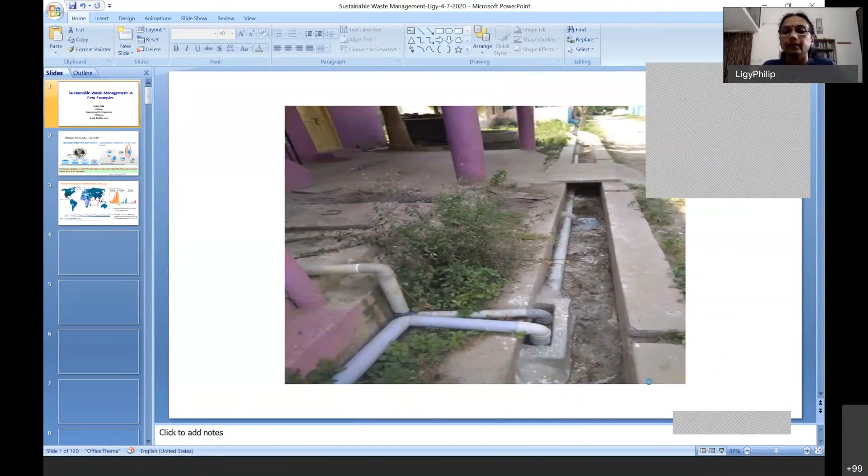Hope my screen is visible, ma'am. Perfectly fine. Okay, so yeah, I'll just start off.

I'll be talking about sustainable waste management, and I will explain a few examples of work carried out by our group. Before going into waste management, we will see what is the present status of our water and waste management in India and elsewhere.

When we talk about water, the world is facing water scarcity. If you look into the freshwater reserves, around 97.5% is salt water, and we have only 2.5% freshwater. Of this fresh water, around 68.7% is in glaciers, 30% is in groundwater, and surface water is only 0.4%. All the glacier water and a part of the groundwater and permafrost water is not available, so the available water sources are very, very limited.

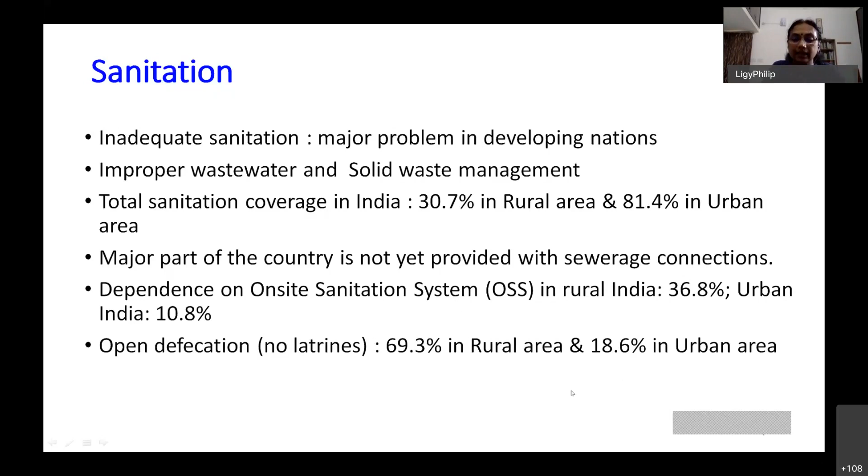When we talk about fecal sludge, this is another important problem we have to address. As I told you, we have sewer connections in only 12 to 14% of areas. So most households depend upon on-site sanitation systems, and all these systems generate fecal sludge. At present, in most places, people are just emptying it and throwing it away wherever free land is available. Only very little is getting treated, and this creates a lot of contamination in ground and surface water bodies and other sanitation issues.

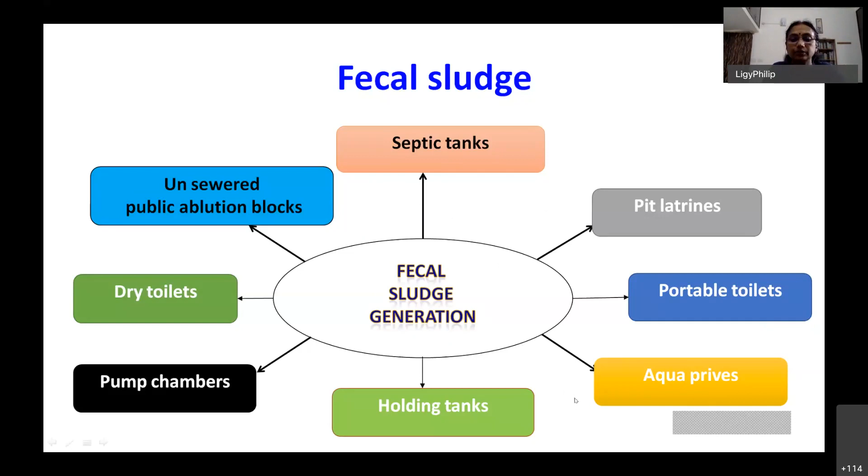When we look into wastewater treatment in Class 1 cities, around 498 of them, the sewage generation is around 35,558 million liters per day, and the treatment is happening only at 32%. In Class 2 cities, treatment is happening at only 8%. Class 1 and Class 2 cities together, the total wastewater treatment is 30%. That means 70% of the wastewater generated is going untreated into water bodies or nearby land. And this 30% that is getting treated is also only partially treated, because nutrient removal and similar processes are not happening in many existing treatment plants.

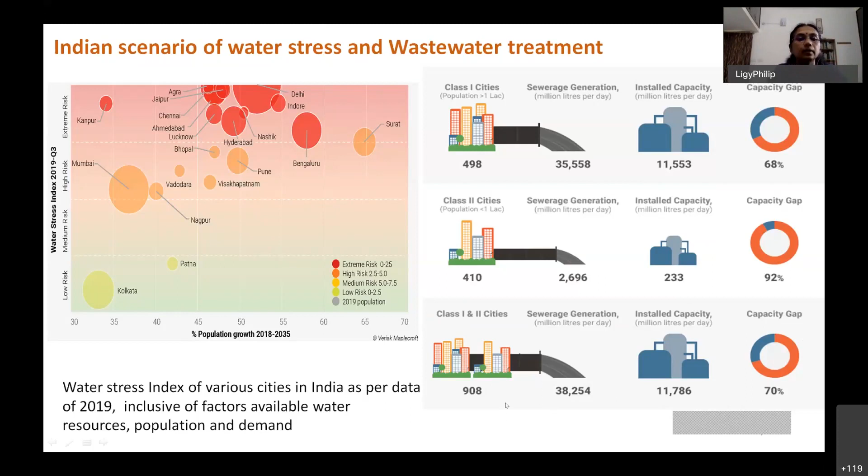And what is the problem? One is that they themselves can be toxic, and the second and most important problem is that when microorganisms come in contact with these pharmaceutically active compounds, they generate resistance. Antimicrobial and antibiotic resistance genes get generated in the microorganisms, and once these microorganisms have those genes and cause some diseases, the existing antibiotics will not be able to tackle the disease. So that is a major problem, and now a lot of emphasis has been given to monitoring this antibiotic presence in the water environment and how to remediate and treat it. A lot of research is going on all over the world.

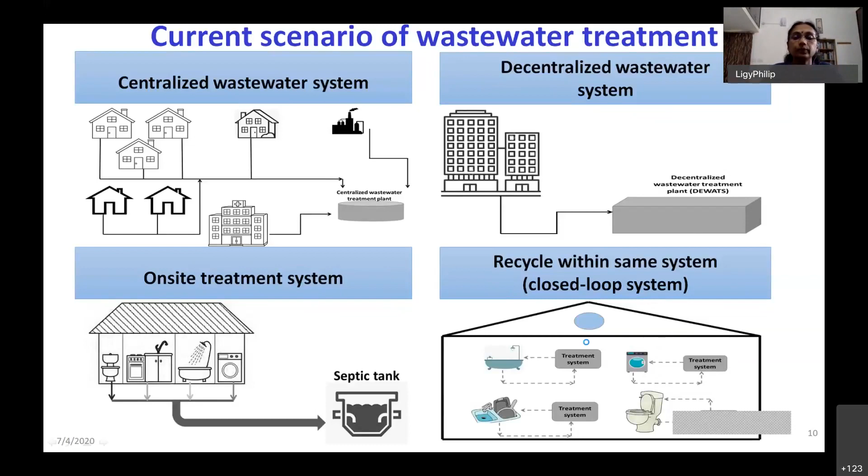As I told you, the current wastewater treatment practice is generation, collection, treatment, disposal - and reuse and recovery is not happening. So definitely it is not a sustainable system. A sustainable system means we have to recycle within it - the system should be a closed loop one, not an open loop one.

So we talk about circular economy, and this is very much applicable for waste management, whether it is solid waste or liquid waste. This closed loop or circular economy is very, very important for a sustainable system.

So there is a paradigm shift existing, and it is essential. In the past, wastewater or waste was considered a problem. Now it is considered a resource. And I keep telling you there are many examples.

The NEWater scheme in Singapore - because in Singapore, most of the wastewater generated is getting recycled. They are treating it, putting it into their rivers and reservoirs. From there, they take it back, treat it, and give us fresh water.

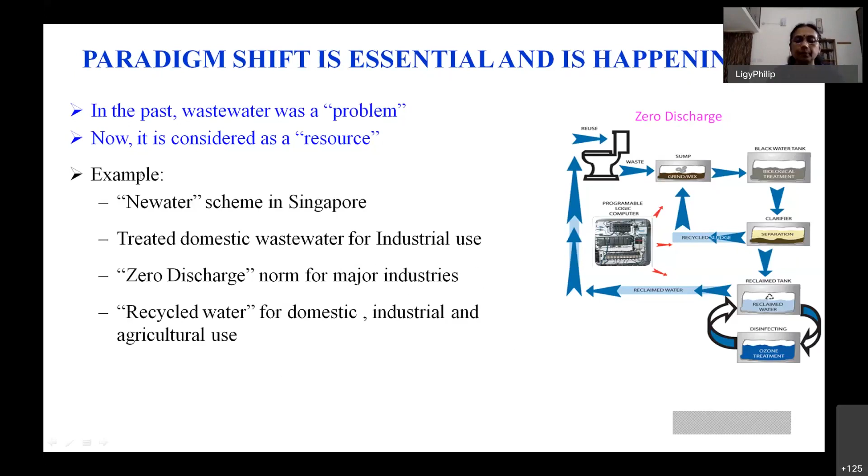Israel is another country where more than 80% of the wastewater is getting recycled. So each drop of water goes through at least 3 cycles of use before it is let into the sea. In India also, many industries are recycling wastewater, and zero liquid discharge norms apply to major industries because they cannot discharge any water. Whatever wastewater they generate, they have to treat it and reuse it within the industry. These things are coming up much better nowadays in India.

So what is the advantage of recycling wastewater? Here I am talking just about domestic wastewater. You know that we need nutrients like potassium, phosphorus, nitrogen, etc. for agricultural purposes and all.

So if you recycle the wastewater or recover the nutrients from the wastewater and reuse them, you will be able to recover around 16.6 Tg of nitrogen, 3 Tg of phosphorus, and 6 Tg of potassium. In terms of global fertilizer nutrient demand, we can meet around 14.4% of nitrogen, 6.8% of phosphorus, and 18.6% of potassium by recycling wastewater, because we know that all these resources are getting exploited. Potential revenue generation is also very high.

So when this type of scope is there, why are people not going for it? If you recycle the water from domestic wastewater, it is equivalent to 75% of the projected industrial demand in 2025.

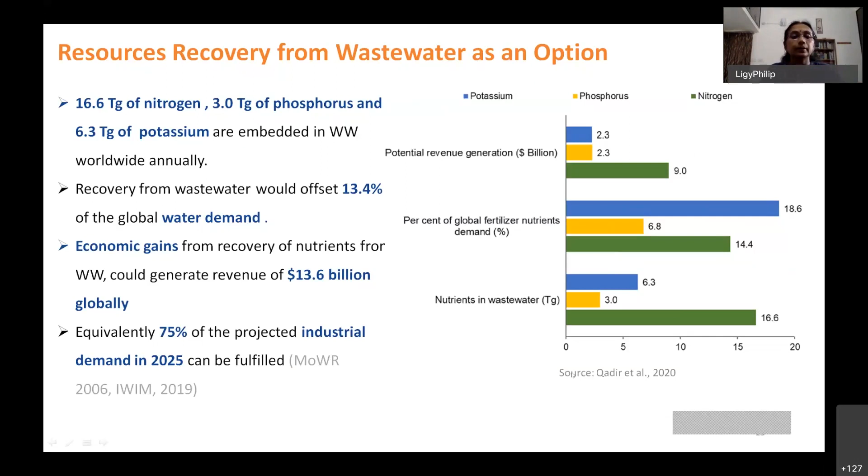That means the domestic water supply, if we can treat it and bring it to a stage where it can be recycled, then 75% of the industrial requirement can be met by that one. So the sanitation scheme in the future should be a closed loop.

Presently it is a linear loop. We get the fertilizers, cultivate agricultural products, bring them to the city or towns, consume them, and whatever wastewater is generated is partially treated, or majority is not treated. Everything is discharged into the river, affecting the health of the river and aquatic organisms.

And whatever sludge is generated is mostly dumped in landfills, contaminating the groundwater. Very little is used for agriculture purposes. So a sustainable sanitation system means this closed loop.

You take water from the river, use it for all purposes including agriculture, and you'll be having wastewater. You treat the wastewater properly to prescribed standards and reuse it for all purposes as much as possible.

Similarly, process whatever sludge is generated so it can be used as fertilizer. Whatever leftover water is of good quality can be discharged into the river to maintain the water flow, so river health is maintained and freshwater withdrawal is reduced significantly. This is a sustainable waste management system.

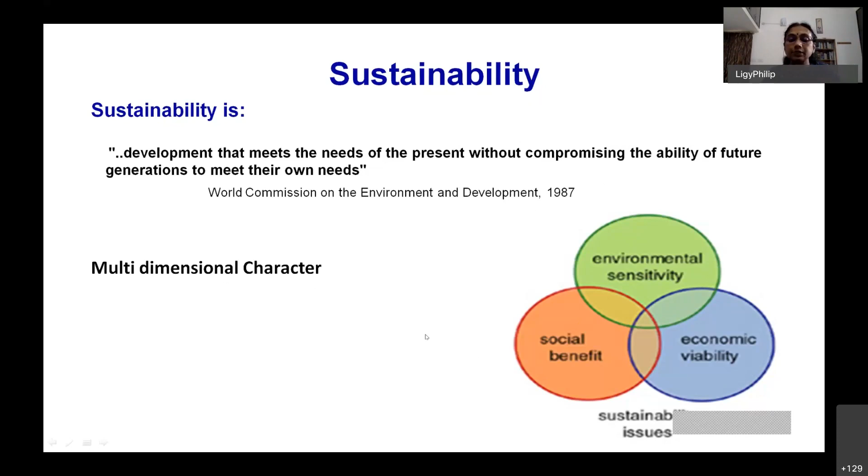By definition, sustainability is development that meets the needs of the present without compromising the ability of future generations to meet their own needs. It has a multi-dimensional character: you have to look into social benefit, economic viability, and environmental sensitivity. These are the three major pillars of sustainability, and all three aspects must be considered for sustainable systems.

When we talk about economic sustainability, the system should be able to pay for itself, meaning cost should be less than benefit, along with human well-being through optimal allocation of scarce resources. All resources should be included. Usually only financial cost and benefits are considered, but that is not the right thing.

We have to look into social impact and environmental impact, because if you have a water supply system that generates wastewater and it's not treated, it has a lot of environmental and social impact. Most of the time we only look into financial cost to assess if a project is economical, but that is not the right way to look into it.

When we talk about environmental aspects, we have to look for long-term viability, including containment of resource depletion, controlling emissions, and protection and efficient utilization of resources. Environmental sustainability means the ability of the environment to sustain human ways of life.

We also need to look into ethical aspects — don't go for anthropocentric policies, meaning assuming all resources are only for human beings and other creatures or living beings are not important. We have to look into nature's carrying capacity; if we exceed it, it will definitely have a long-term adverse effect.

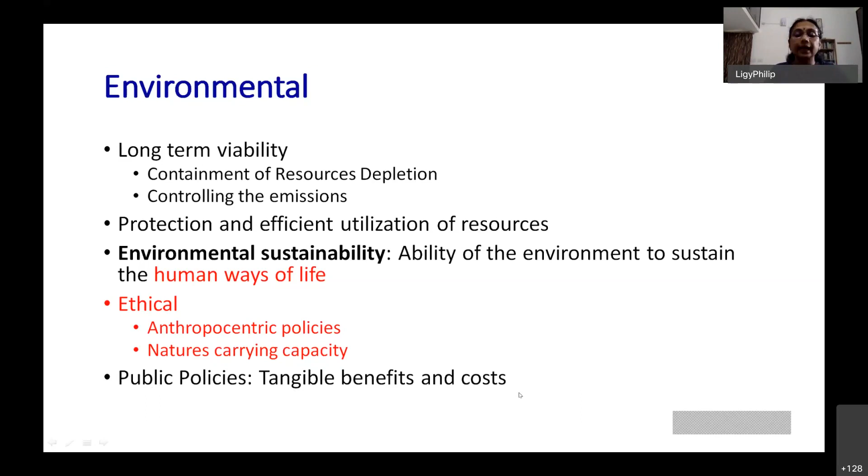Public policies mostly look into tangible benefits and costs, but we have to consider intangible costs and benefits when we talk about environmental aspects. When it comes to social and cultural aspects, we need to secure people's social, cultural, and spiritual needs.

When we talk about water in India, water is more than water, because we give much more importance to it due to religious and cultural reasons. For example, River Ganga is a river, but we know it holds much more place in every Indian heart.

When we come up with some systems, we have to look into social stigma, psychological inhibitions, etc. Technically you may think it's going to work, but societal acceptance or people's acceptance is necessary when we develop a system. Otherwise it will not be successful at all.

So how can we select sustainable technology? We have to carry out exergy analysis, that means total energy input, output, system energy, etc. We also need economic analysis, life cycle analysis, and general systems analysis, including material use, emission cost, required land area, etc. Unless we consider all these things, we cannot tell whether a technology or project is sustainable or not. I am not going into the details of calculation.

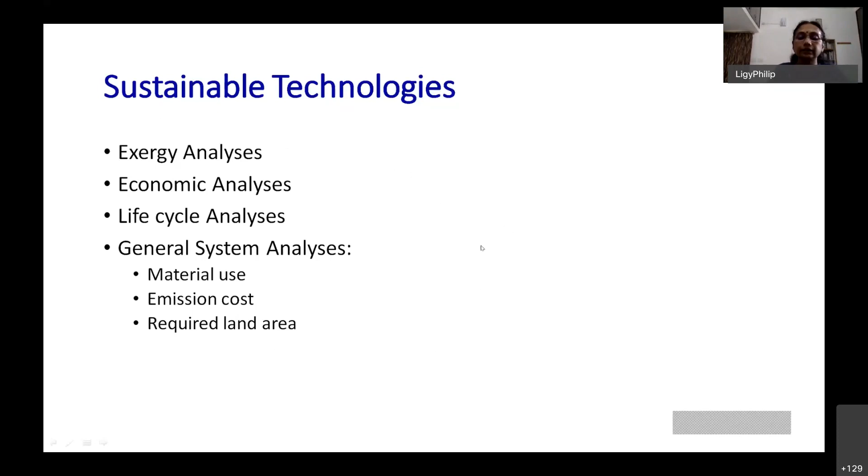Now I'll get into a few examples of closed loop waste management developed by our group. First, I will discuss what we do at IIT Madras. I have presented this in many forums, and I thought this will be useful for this group of people also.

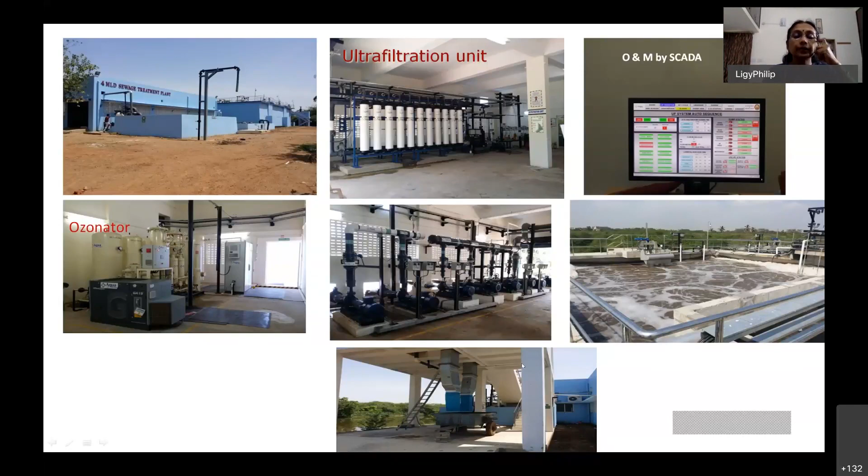So now what we are doing is the secondary treated water after ultrafiltration and ozonation, we are storing and supplying to all the toilets and other secondary users.

Then some water we are storing in a pond for flora and fauna enhancement. This will also enhance water percolation to some extent.

When we talk about toilet flushing, air conditioning and all, maybe around 60 to 80% of the water will be required, but we still have leftover treated water. So what we do is we have a filtration well with around a 2 meter deep sand bed, with perforated collection systems.

After the filtration well we have a long infiltration gallery. So the water after the filtration well gets into the infiltration gallery, and it slowly reaches the lake. We have a big lake in our campus which collects all the rainwater falling in our campus, along with the leftover treated wastewater after all the treatment. Then we have put up a water treatment plant here.

The water treatment plant can treat around 0.8 MLD, 8 lakh liters per day. We take this water from this lake and give it treatment - direct filtration, adsorption and disinfection. This water is blended with our water supply system, along with whatever we get from the Chennai Metropolitan Water Supply System, and used for supply.

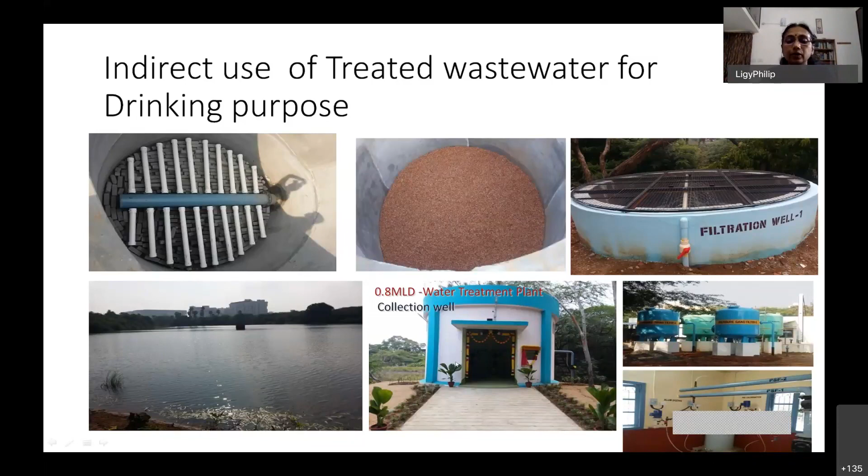So I'll show you the cost analysis. The total cost of the STP was around 10 crore, and the grey water pipeline throughout the campus cost around 7 crore. But if you look into the tangible economic benefit, more than 2.5 crore savings on water bill per year.

In Chennai we have to pay 60 rupees per meter cube of water. So when we get this much water through the recycled system, that much less water we are buying from the CMWSSB. So every year we are saving around 2.5 crore on the water bill.

This is the tangible benefit. The intangible benefit is that we are not taking out any water from the ground. Last year when there was a severe drought, our campus didn't have any problem because this recycled water was meeting more than 60 to 70% of our requirement. So we didn't have any problem.

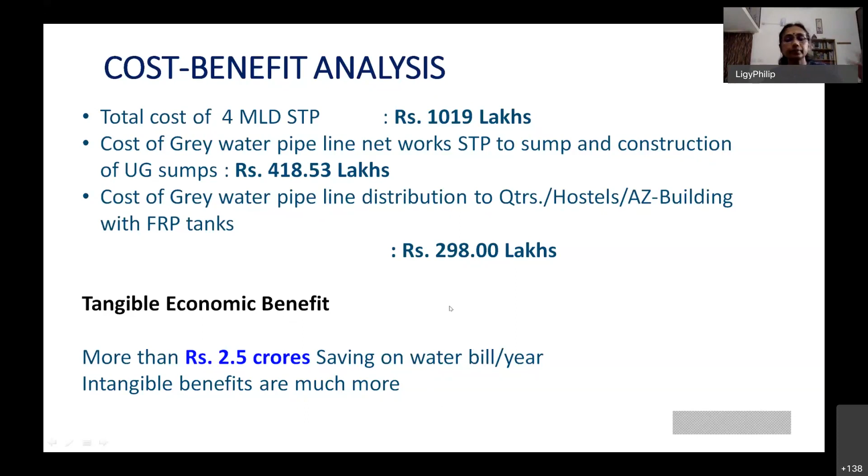So what I'm trying to tell is economic benefits are there, and a lot of intangible benefits are there. We have looked into the cost benefit analysis based on capacity - what type of plant will be economical. If you go for very small plants, it may not be that economic. All these things we have looked into.

And what is the impact - by seeing our plan, Chennai Metro and Sewerage Board is planning to recycle water for domestic supply. Already industries are using the recycled water. Already 2 plants of 10 MLD are under construction, almost getting over. They're planning to put up another 260 MLD recycling system. And IIT Madras is providing all the technical advice for all these projects.

Because if you do something good and it is sustainable, and people see the good points of it, definitely we don't even have to go and publicize it. People come to know and it will be multiplying. That is a good thing about this.

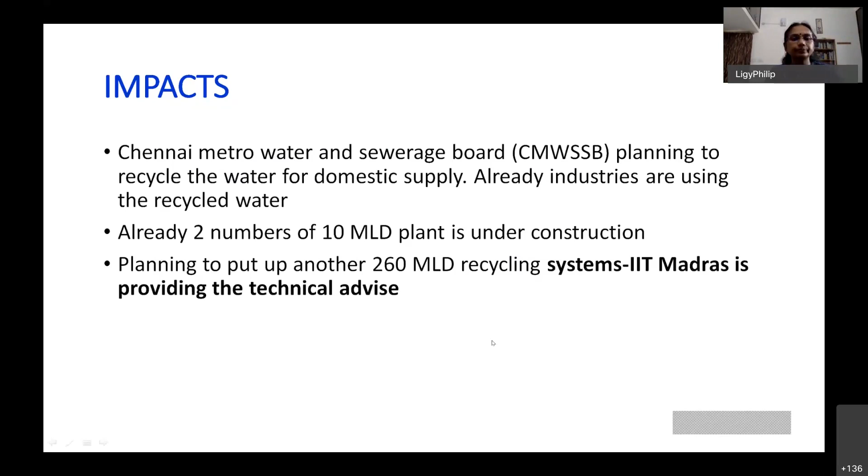So now I'll talk about other systems - integrated water management, whether we can have zero liquid discharge, or how we can minimize freshwater utilization in any household. When we talk about sustainability, it should be reliable and cost effective, social acceptance should be there, less demand on resources should be there, and closed loop should be considered as far as possible.

So this is household wastewater closed loop management, what we always talk about. If you take 150 liters of water per person per day, we use the water for drinking, cooking, bathing, laundry, non-recycled toilet, all those things. When we talk about different users, very good quality water is needed for drinking, cooking and dishwashing.

We cannot take any risk there, because we are dealing with people and health is very important. Then when it comes to bathing and laundry, good quality is enough. For washing floors and other things, moderate quality will be sufficient. When it comes to toilet flushing, we don't have to use drinking water quality - the quality can be poor. Poor means there should not be any pathogens.

Because when you use recycled water and if it is having pathogens, when you do the flushing, aerosols will be generated. Those aerosols can have the pathogens and it will be creating problems. So we have to see that whatever water we use for toilet flushing is free from pathogens. That is one thing, and it should not contain large quantity of organic matter.

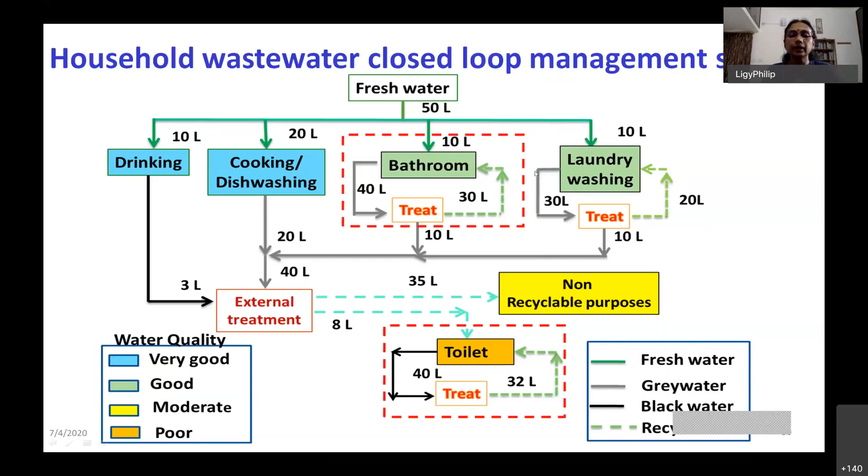So what we have done is, we wanted to do an extensive study. We looked into different economic classes of people in the IIT campus, their water consumption for each purpose, how they are using the water, and so on. We have complete data, and we have published papers on this.

Water availability varies depending upon the economic status of the house, because as per government rule, based upon the square feet area of the house, the water tank capacity also varies. So that is what is happening here.

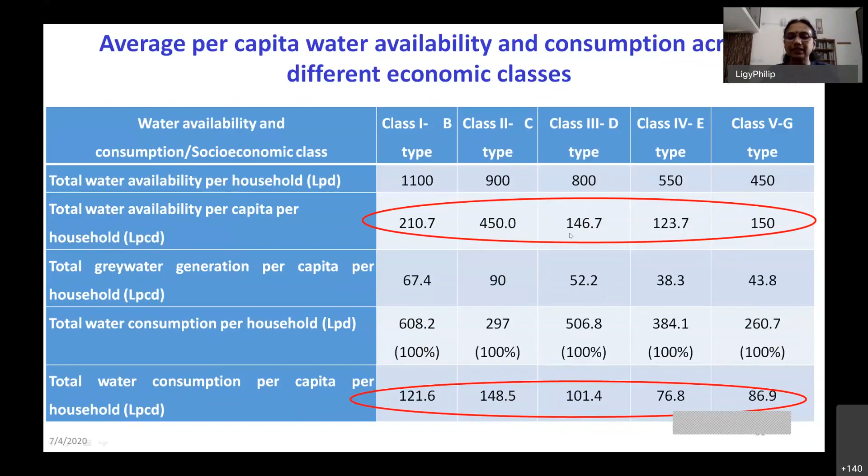If you see the water consumption pattern, this is in Chennai, India, where the weather is very hot, so maximum water is used for bathing purposes, then toilet flushing, and other purposes you can see here. Now, for the generation of organics household-wise - B type, C type, D type, E type, G type, these are the government types of housing - you can see that depending upon the household type, the organic load is varying.

From bathroom water, laundry water, kitchen water - the axis also you see here, it is 200, 400, and here it is 500, 1000, because kitchen water has much more organic load compared to bathroom and laundry water. Bathroom water is relatively clean, so the treatment is much easier.

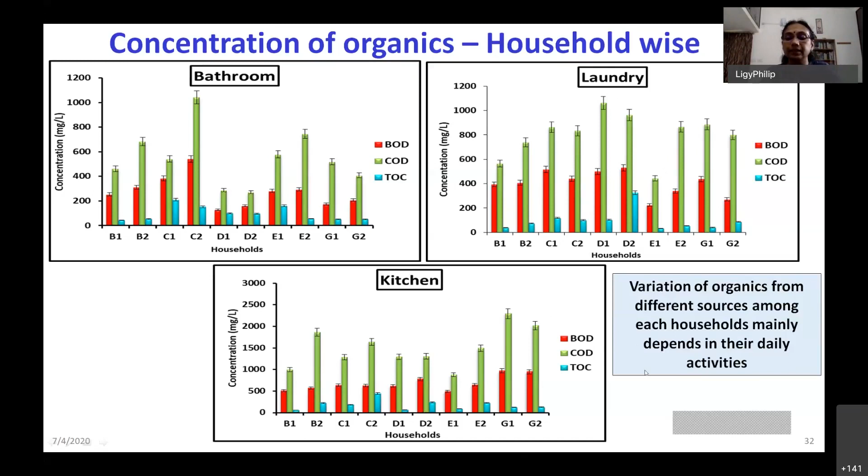We also looked into microbial contamination from sources and households. Tap water doesn't have anything. Bathroom water has some total coliforms and fecal coliforms. Laundry water has it too, and kitchen water, sometimes where they are using non-vegetarian food, we could see some fecal contamination in the kitchen water also. The contamination also varies depending upon the households and the age group of the people there. Wherever very old people and very young people are present, the fecal coliform in bathroom water, laundry water, and so on are high.

Another important thing to look into when we talk about bathroom water, laundry water, and so on is the presence of surfactants. Kitchen, bathroom, laundry - everything has a high amount of surfactants because we use different types of detergents for various purposes. So naturally, it will come out in the water.

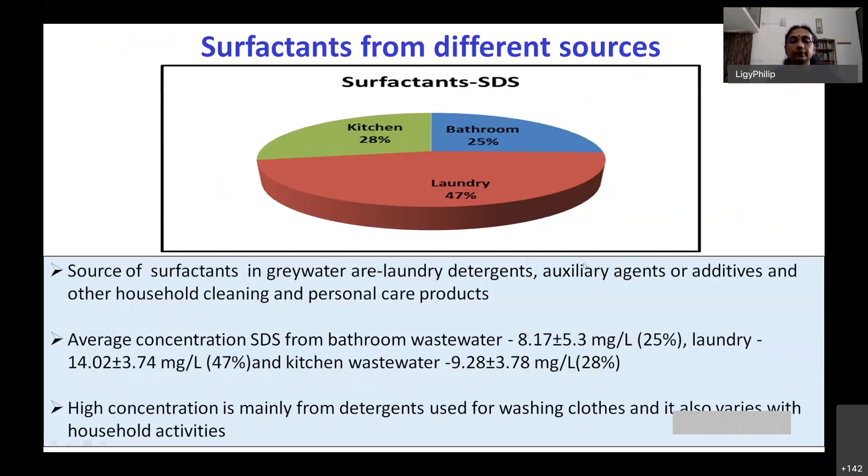We also looked into emerging contaminants like personal care products and pharmaceuticals, and we could see that around 78 different organic compounds were identified. Bathroom wastewater had a high number of fragrances and flavors, followed by pharmaceuticals. I have summarized here what we have seen: softeners, pharmaceuticals, preservatives, fragrances, emulsifiers, surfactants, dyes - all these things are coming in the water. So when we develop a treatment system, it should be able to remove all these contaminants.

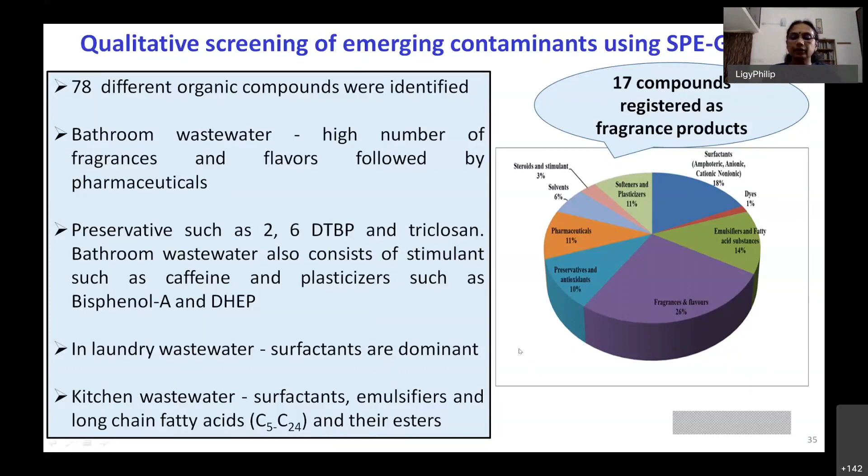When we recycle the water, there will be a lot of risk and it will create other problems. So after analyzing all those things, we thought we'd have a treatment scheme.

This is the grey water treatment system we have proposed. Grey water means water from bathroom as well as laundry. So coagulation, flocculation, and settling, followed by ultrafiltration, because after coagulation, flocculation and settling, still some dispersed flocks will be there, so we have to have adsorption.

After this treatment, this can be used for toilet flushing, gardening, floor washing, because the water is relatively clean. But if you want to go for bathing, we have to see the risk associated with the compounds which come in contact with the skin.

Most of these emerging contaminants have some risk, so we have to remove all of them. We thought that an adsorption system may be a better option. But the most commonly used adsorbent, activated carbon, is not capable of removing all types of compounds, because you will have both hydrophilic and hydrophobic compounds present in the system. So we have to have some adsorbent which is able to remove all types of compounds - we have to tailor make the adsorbent.

So this is a sustainable treatment and reuse concept. You have the bathroom water and wash basin water, you collect it, treat it, and use it for flushing and even for bathing. This is the concept we have employed.

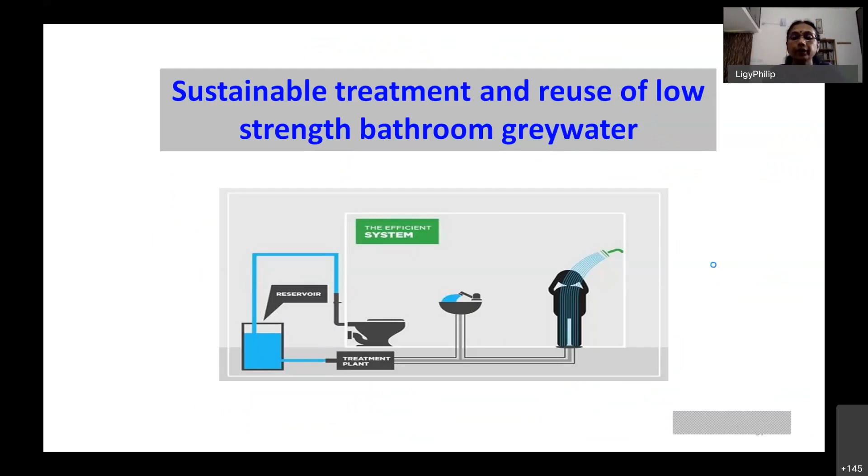So this is the coagulation flocculation unit, ultrafiltration unit, and adsorption. Whatever sludge comes out will be going to the drains, to the toilet water. So it will get treated there, and after adsorption, water will be going for bathing.

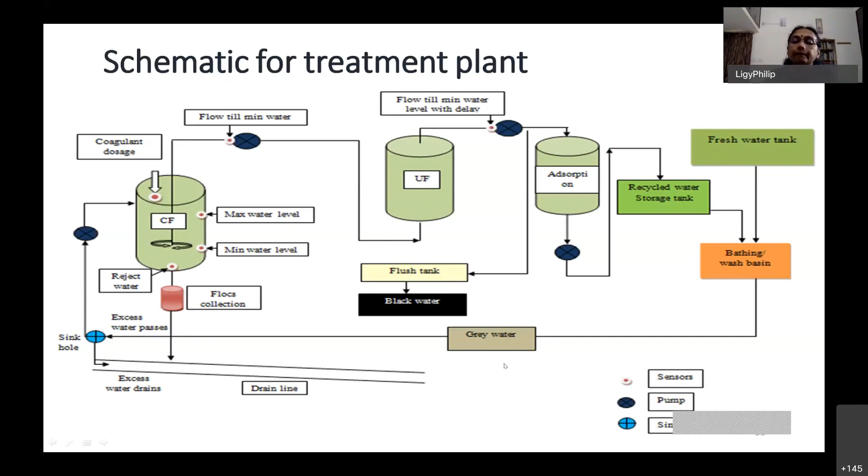For ultrafiltration, we have used the available PES membrane, but what we saw was the flux was reducing significantly. So we modified it with silica - we coated with silica and doped the silica membrane, modifying the PES membrane. You can see that by modifying, the removal efficiency has significantly improved, and even the water recovery is significantly improved.

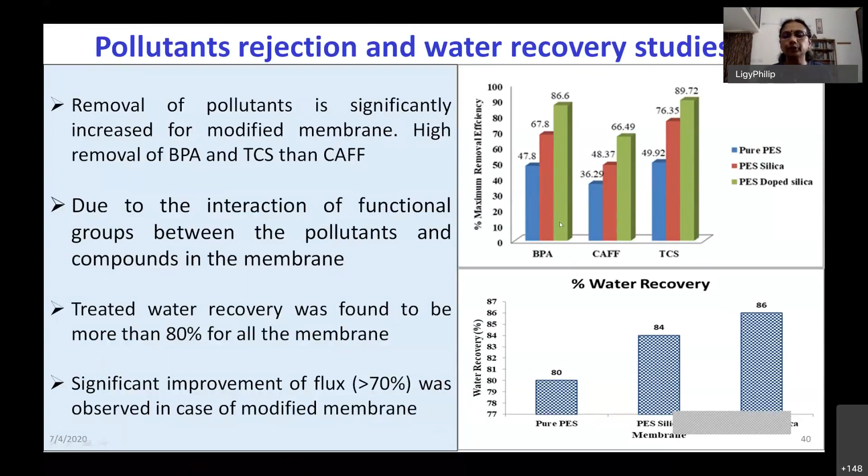Depending upon the use, we have to select appropriate membranes, or whatever available membranes you have, modify them to increase efficiency. So this is what we have done.

For the adsorbent, as I told you, activated carbon alone will not work because that is good for hydrophobic substances but not for hydrophilic substances. So we synthesized a tailor-made adsorbent - graphene oxide, activated carbon and chitosan, and we also added some iron particles. So this is a composite adsorbent that we have used for the adsorption purpose. It can take up both hydrophilic and hydrophobic compounds.

What we have proposed is to collect all the water after the toilet. If it is a flat, you can collect all the water in the next sunshade - you put a tank and collect it there, and put a tank above the toilet where you have some space, and pump it there, and your treatment system will be there, and from there the treated water will be coming, and it can be used for toilet flushing or even for bathing, depending upon the requirement.

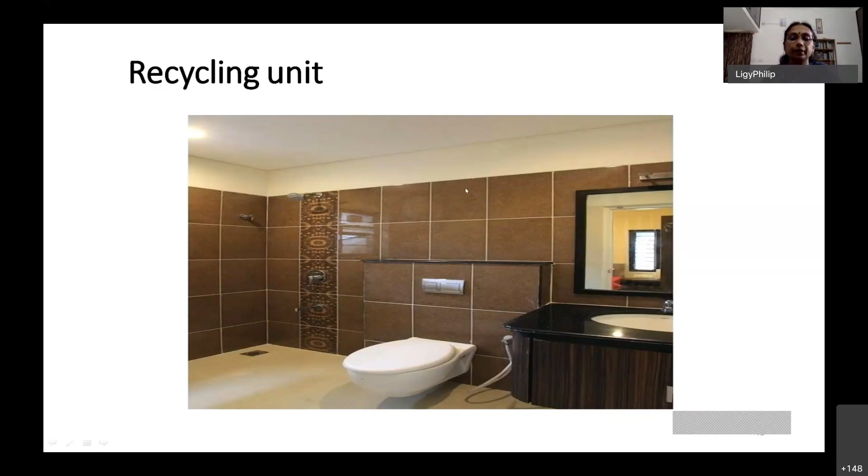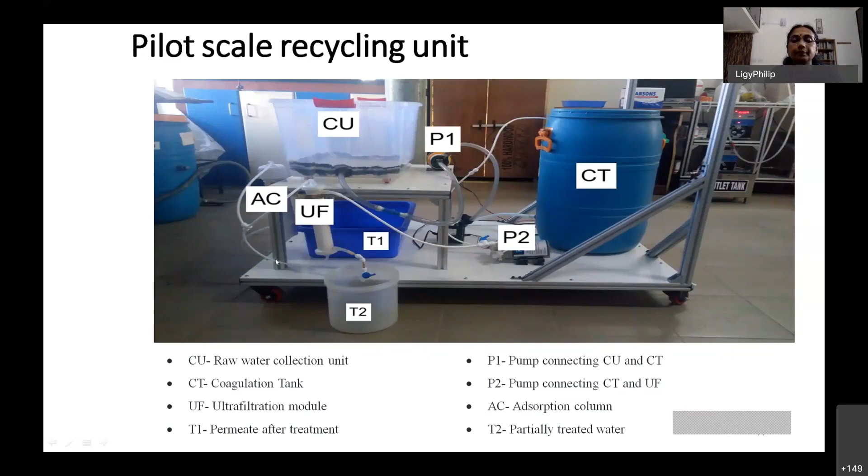So this is the pilot scale recycling unit we have - this is the collection unit, and coagulation, flocculation, ultrafiltration, and this is the activated carbon adsorption system. We also developed in-house online monitoring systems like turbidity, TDS, pH, etc., to see that the treated water is meeting all the required quality standards. That's why we have the online monitoring system also.

You can see that we don't have any mechanical devices for the coagulation, flocculation. The systems are designed such that the water pumping pressure itself will be sufficient to provide enough mixing. You can see that the treated water quality is as good or better than the tap water we normally get for bathing and such. So this is one system.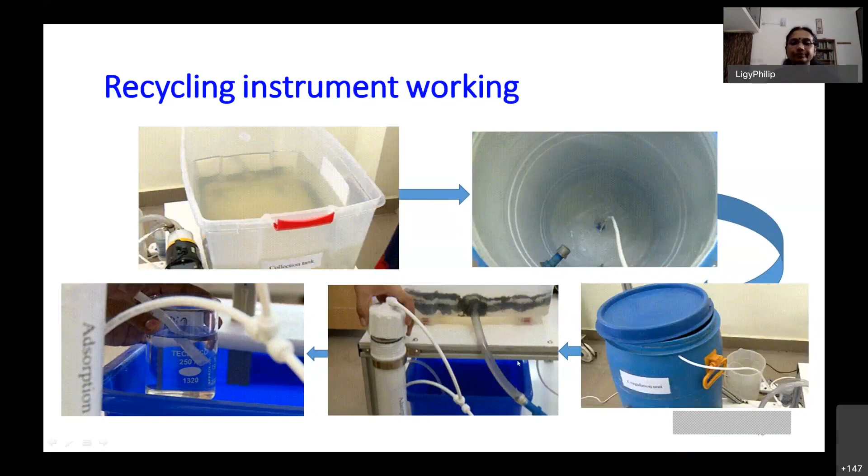Another one - this is bathroom water and wash basin, washing machine water together.

Another thing we have developed is the washing machine itself, whether we can recycle the water. We conducted a survey among various people who told us they have no inhibition about recycling water within the washing machine, so that's what we've done here. This is our model system, and we've already signed NDAs with some washing machine manufacturers, and the prototype is ready. It is a combination of coagulation, flocculation, and filtration, and you can see rinse 1, rinse 2, and rinse 3 water.

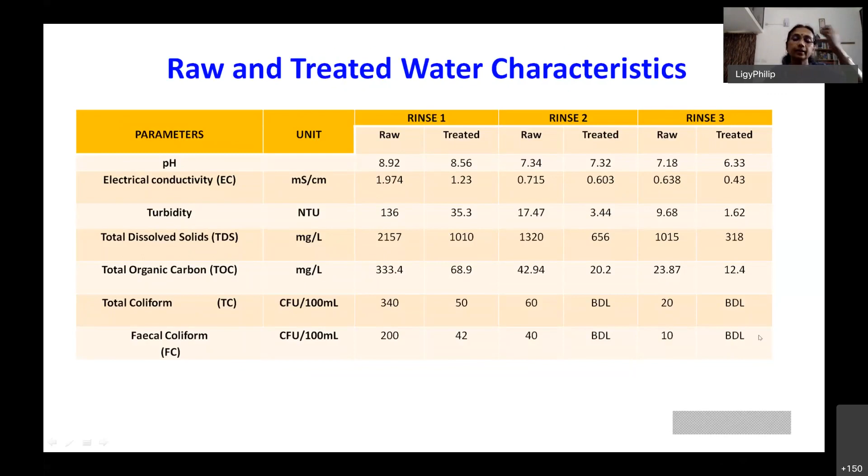After the treatment, the water is as good as tap water. So this is another zero liquid discharge system, whether we can have a toilet which doesn't need any water and which will not generate any waste. That is another thing we have developed, again a closed loop system.

So here, whatever waste comes to the toilet, we put a separator, and the liquid and solid get separated. The liquid, which is flushing water plus urine, goes for distillation using a solar vacuum solar system. Whatever solids come out, we use a screw pump to take it to a solar dryer and dry it. When you dry it at above 100 degrees centigrade, all the pathogens get killed, and you get a sterilized solid which is rich in nutrients. That is what we have done.

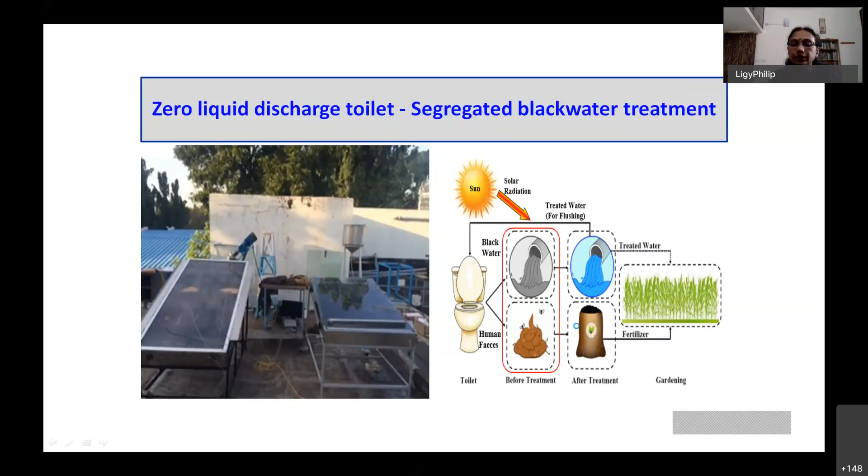You can see the quality of the treated water here, and this is the separated water. You will have around 15 to 20% reject, which can be mixed with the solid and dried, so you get very high nutrient content.

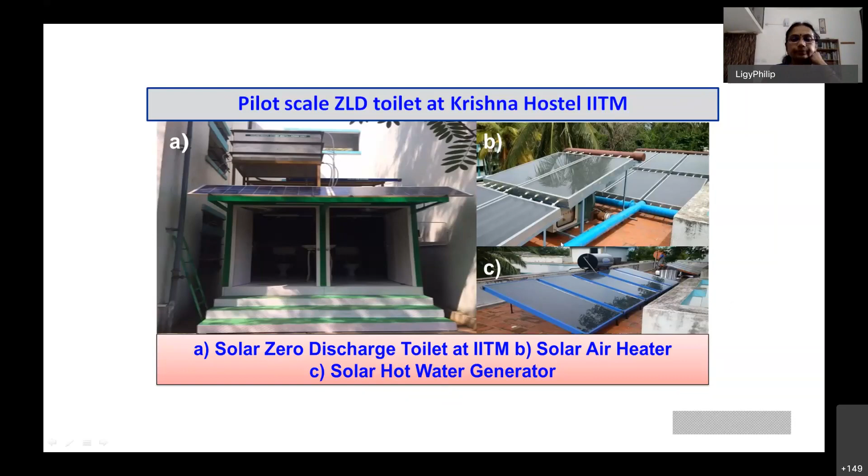Thank you very much. So after doing a lot of lab scale and pilot scale studies, we put up a system in our hostels. This is the toilet, and these are the solar systems, and it is working. We are getting everything and no waste coming out, and we don't have to provide any water, because whatever water is generated in the toilet gets recycled. Because it is distilled water, it can be used not only for flushing but even for washing, and whatever solid comes out can be used as a soil conditioner or fertilizer because it is sterilized solid. This is the solar dried feces.

We did elemental analysis and pathogenic analysis, among other things. We also looked into the net CO2 mitigation effect and treatment cost of the distiller and dryer. The cost comes to around 1.45 rupees per liter, and for the solid it is around 3.13 rupees per kg. Yes, it is slightly costlier than the conventional treatment system, but these things will be good for remote places or tourist places where accessibility is difficult and you want a better system. This type of toilet can be used there.

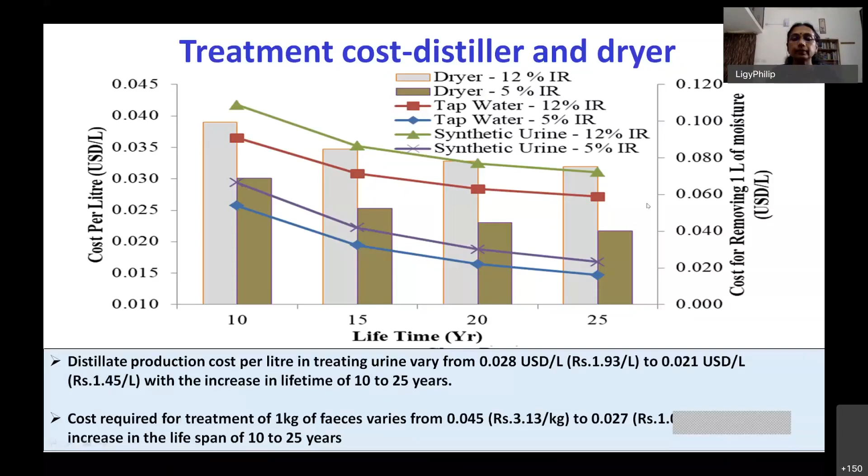I'm not going into the summary. Another thing we have done is a sustainable solar powered wastewater treatment system to improve hygiene and sanitation in schools by adopting recycling and online quality monitoring. When we talk about schools, especially in states like Tamil Nadu where water scarcity exists, many students are not able to use the toilet because of non-availability of water. So if we can have a proper recycling system and ensure the quality of treated water is good, then we can adopt this system. That was our purpose.

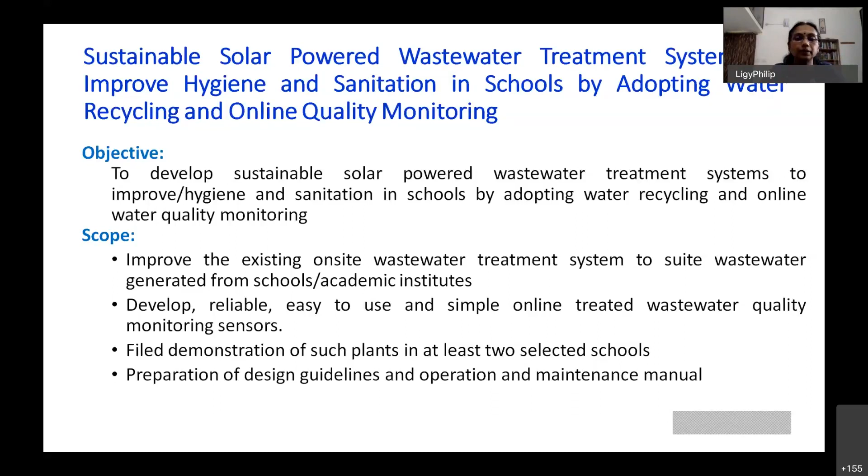So what we have done is not rocket science. We have a modified septic tank. When we talk about the wastewater generated from schools and institutions, it is more difficult to treat compared to domestic wastewater.

People think that school water is easy to treat because there is no feces, but it is the other way because mostly it contains urine and the organic content is very less. So it is very difficult to remove the nutrients from the water because the C/N ratio is very, very small.

So we have to do some manipulation in the treatment. So that's what we have done. We have a modified septic tank and only a part of the wastewater goes to the septic tank. So majority of the treatment, organic matter removal takes place here.

Then this water comes to an attached growth aerobic system. And here we didn't want to have any power supply problems, so the entire system uses solar power, and we didn't use any battery to store the power. So the aeration will work only when the solar power is there, that means morning 9 o'clock to evening 4 o'clock.

So during that period, what will happen? Whatever water is coming out of the septic tank comes here, and the ammonia and remaining organic matter will be getting oxidized to nitrate and carbon dioxide.

And during the non-aeration time, after 4 o'clock, we have a timer here. The remaining water that didn't go to the septic tank comes to this tank, and there is no aeration. So anoxic conditions prevail, and you have enough organic matter, so your denitrification happens here.

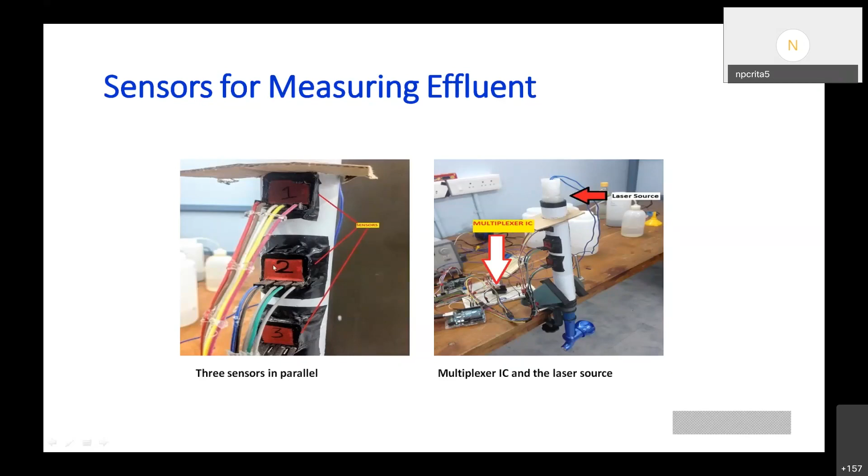So we developed our own sensor. This is a lab scale sensor. And once we did that, we did the

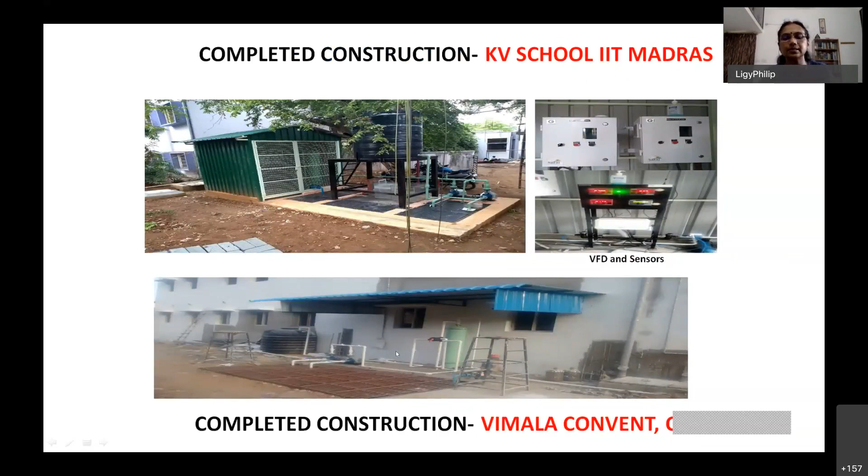And this is in a KV school, more than 1,000 students. So this is the school, and the area required is equivalent to a septic tank. So your anaerobic system and the aerobic system will be underground, and other things will be the control system and the sensors and all. So this is the system, and it is working for the last 2 years without any problem.

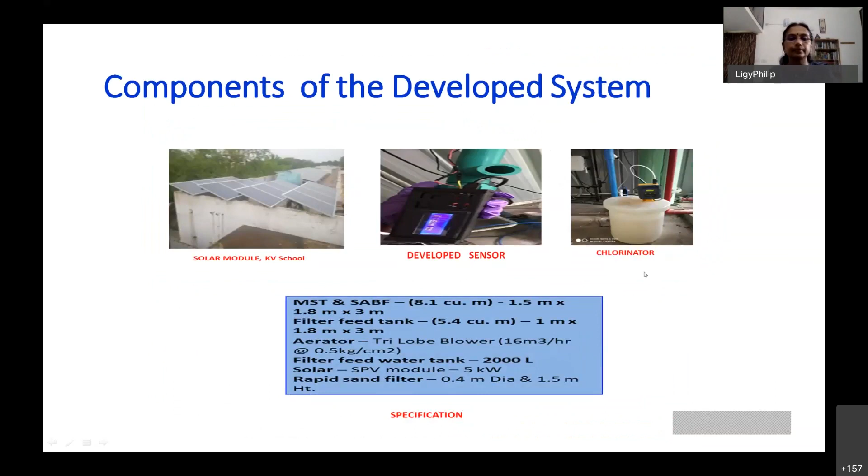Now, what I'm trying to tell is, if you think about it, we'll be able to come up with very good, sustainable solutions, which don't need much operation and maintenance, much sophisticated systems and all the things.

This is another example. So till now we were talking about domestic wastewater. So we will discuss a little bit about industrial wastewater treatment, whether we can make it sustainable, whether we can treat the industrial wastewater. So I'm just giving an example of an industrial wastewater.

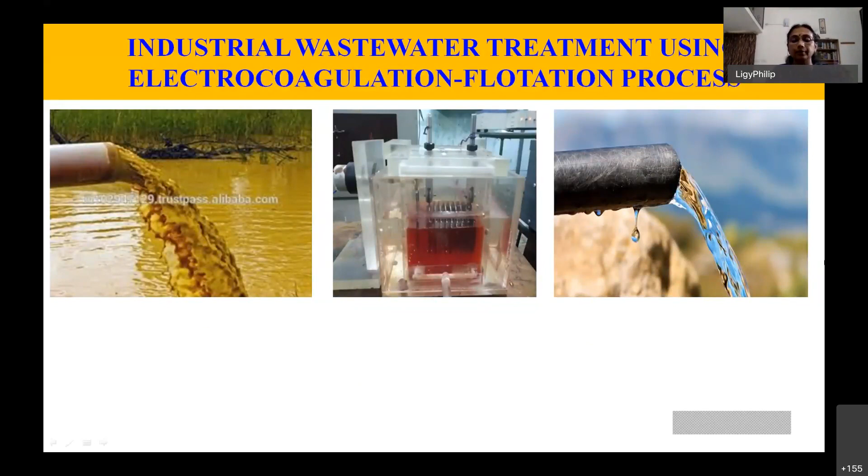We have taken textile wastewater and used electrocoagulation flotation process. What we have done, I'll just explain. We know that industrial wastewater is a major problem. Around 5.5 to 10% of the total water is used by industry, and they generate a large quantity of wastewater. This is the Indian condition, and the global scenario is also not very good.

Even in Germany, around 134 industries are releasing wastewater directly to water bodies. Bangladesh, Europe, North America, everywhere, this is a problem. And India generates around 83,000 plus MLD wastewater from all major industries.

Okay, so this is the condition, and this is a common sight anywhere in India when we go.

If you come to textile industry, 14% of the industrial production and 12% of the total manufacturing export earning is from textile. Textile industry in India uses around 830 million meter cube per year, and wastewater discharge is around 640 million meter cube per year.

Lot of dyes are coming out. Around 10 to 15% of the dyes are directly lost into the industrial wastewater. Most of these dyes are toxic, mutagenic, carcinogenic, and extremely recalcitrant.

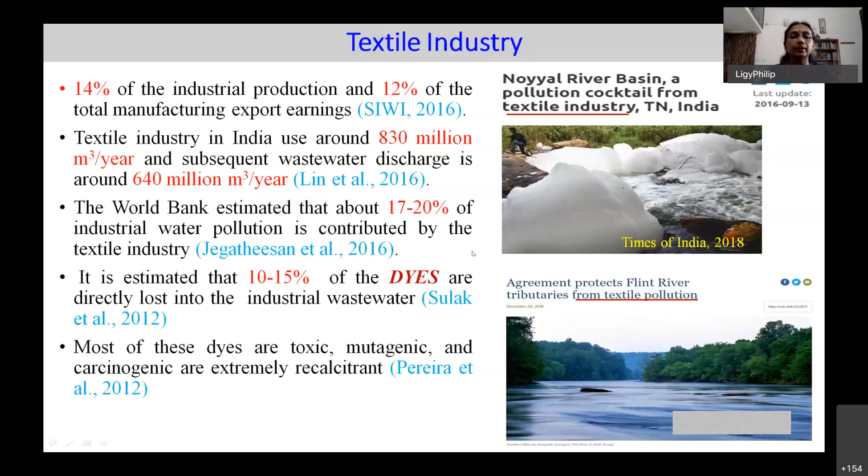So what are the common treatment systems adopted? Many places go for biological treatment because some organic matter will be there. Then physical, chemical process, adsorption, precipitation - all the primary treatment they do, then go for membrane, because many of the textile industries have to achieve ZLD, and it becomes very, very costly.

Then some industries are using advanced oxidation process for the removal of dyes, because biological process is not capable of removing all the dyes, and precipitation and all generates a lot of sludge, and sludge management is a major problem.

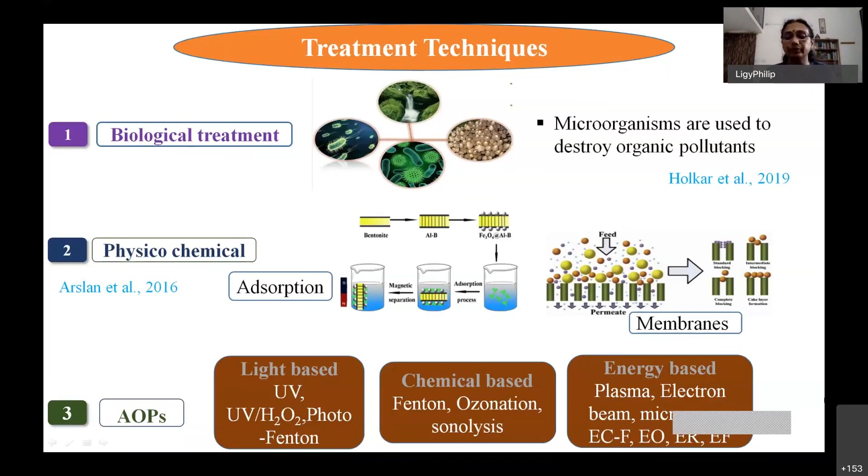So advanced oxidation processes are like UV and hydrogen peroxide, photo-Fenton, Fenton, ozonation, sonolysis - all those things are being used, and nowadays people are trying plasma, electron beam, microwave. Many new technologies are being tried.

So what we thought is, we'll take the age-old electrocoagulation flotation method, and nowadays it is not being used very extensively. The reason is electrode passivation is a major problem because you have to keep on replacing the anode, and the cathode will be getting passivated, so your process efficiency will be reducing drastically.

So if you see the process, this is what is happening at the anode: oxidation is happening at anode, the metal is getting oxidized to metal ion, and at the cathode reduction is happening. The major reaction is water getting converted to hydrogen gas and hydroxide ion.

So this metal hydroxide forms the coagulant, and this H2 gas will be generated, that will be helping in the flotation. So the coagulation is there, flotation is there - electrocoagulation, electroflotation - and this system you will be having electrocoagulation and flotation together happening when we apply some voltage. So this is what electrocoagulation flotation system is.

So the mechanism: oxidation, organic matter will be getting oxidized some amount into carbon dioxide and water. Then entrapment, adsorption, charge neutralization, complexation, oxidation - all those mechanisms of dye removal are happening.

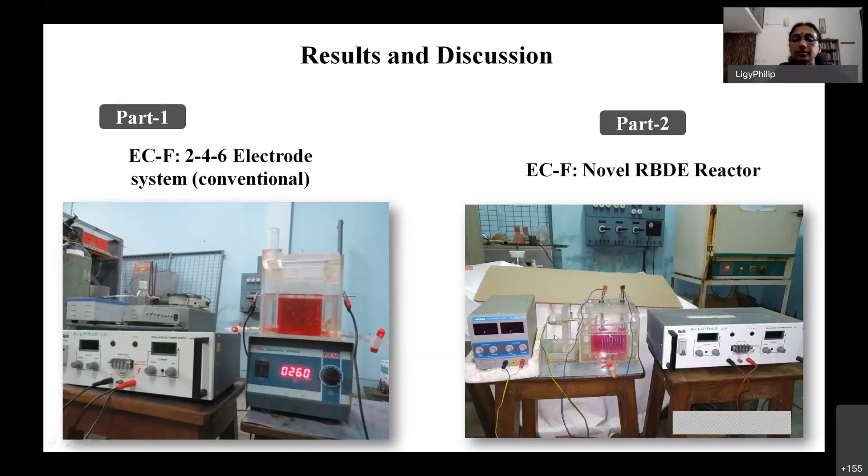Another thing we have used is, we have a lot of construction waste getting generated, and it will be having all type of metals - aluminum, iron, and all. So why should we go for costly anode and cathode using fresh metal? Why can't we use this construction waste as the metal? So that is what we have used: aluminum scrap and iron scrap metal. We have used iron scrap as electrodes.

So two modifications we have done. One is make it a rotating thing so that cathode passivation can be reduced significantly, and the second one is use waste as the material, so the cost can be reduced significantly.

So then we have taken actual industrial wastewater, because if you do the synthetic wastewater and come up and say that it is working very well, we know that there are many other factors which will be hindering the performance in the actual field.

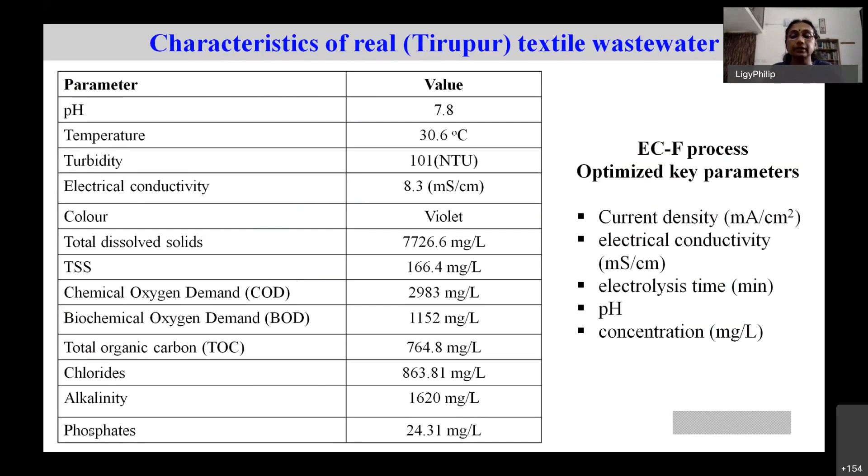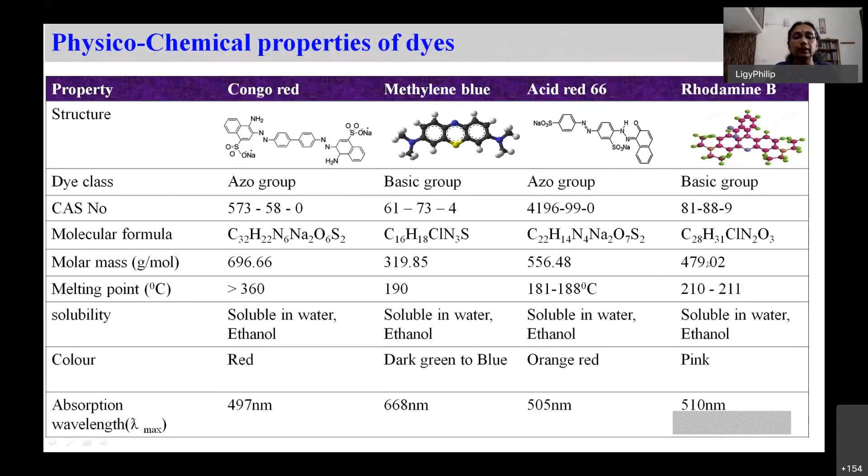So we have taken actual synthetic textile wastewater and did studies, concentrating on 4 different dyes, because many industries use different dyes. So we thought we'll take a mixture of dyes and study the effects.

For the study, we looked into different materials, aluminum alone and iron alone, and we could see that iron performed better than aluminum.

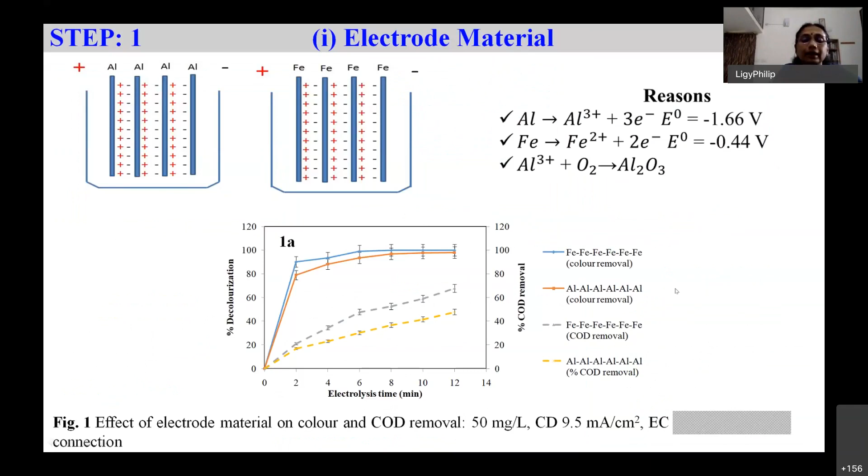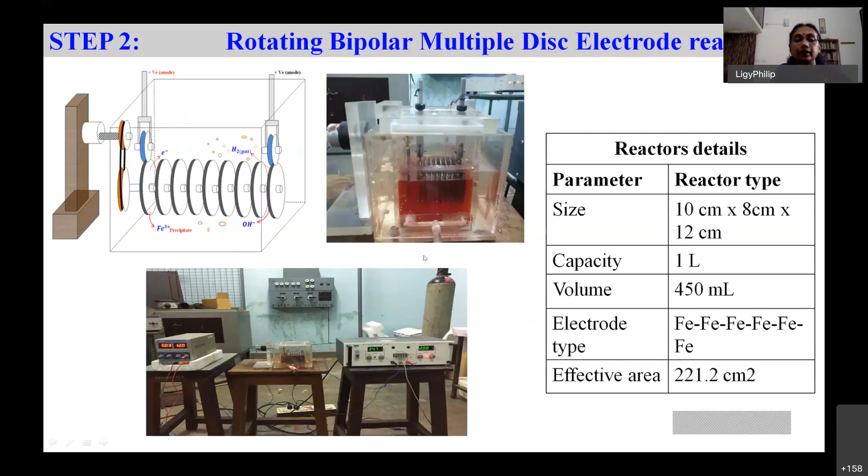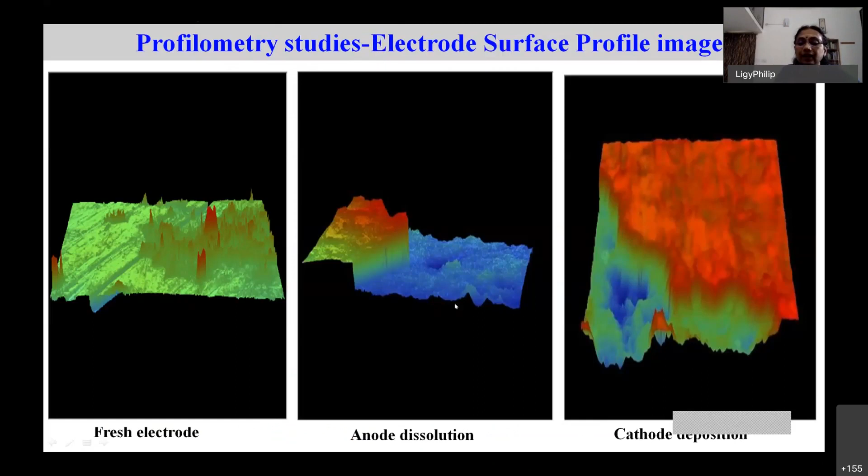Cathode activity improved hydrogen generation, and hydrogen generation improved flotation, so solid-liquid separation is much more effective. More anode dissolution means more coagulants are generated in the system, giving much more efficiency in removing color.

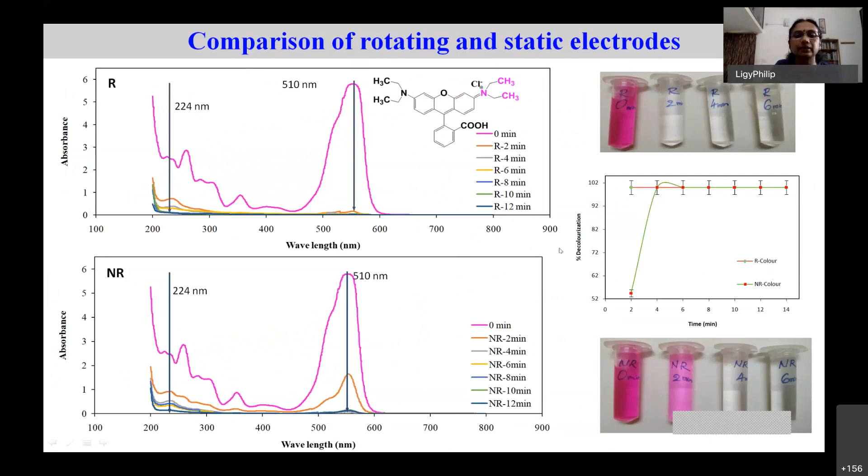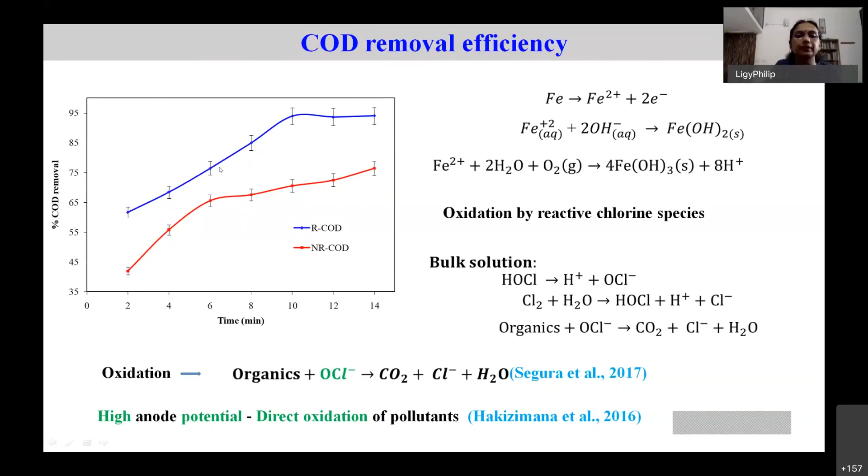Even the COD removal in the rotating system was much higher compared to the non-rotating system.

We also looked into the fate of the dye, and we could see that the chloride present in the system gets converted to chlorine and chlorine species, which enhances the oxidation of the species. So we looked into the pathway of this process.

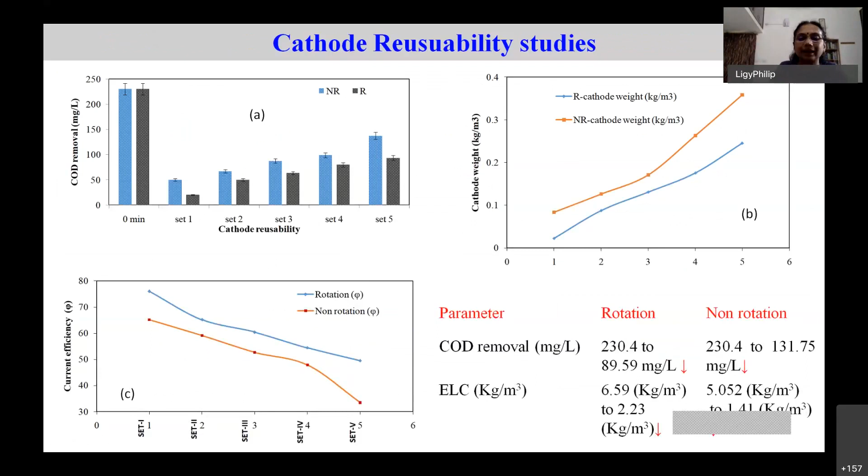We also looked into cathode reusability - how many times the cathode can be reused, since passivation is reduced. What I'm trying to say is, with some thought, we can use waste generated from one process as a raw material for treating waste from other processes. These are sustainable systems.

Advantages include effective mass transfer by reducing passivation, maintaining consistent performance over longer periods, uniform transfer of coagulant matter formed by dissolution of the electrode through proper contact with electrolyte, protecting the electrode, creating turbulence, and homogenizing the liquid, which promotes reaction rate and decreases reaction time. Along with adsorption and precipitation, the electro-oxidation process can be enhanced using this type of system.

So we have a lot of publications on this. That covers the industrial wastewater treatment topic. We have many other things, but I won't go into details of other processes due to time limitations.

So now I'll talk a little bit about solid waste management.

Earlier I was talking about the fecal sludge. Many places it is getting generated - the septic tank, leach pit, twin pit latrine, single pit latrine - everywhere the sludge is generated, and many times it is just emptied and disposed out. It's a major problem. So how can we manage this fecal sludge? We can recover the resource through proper management.

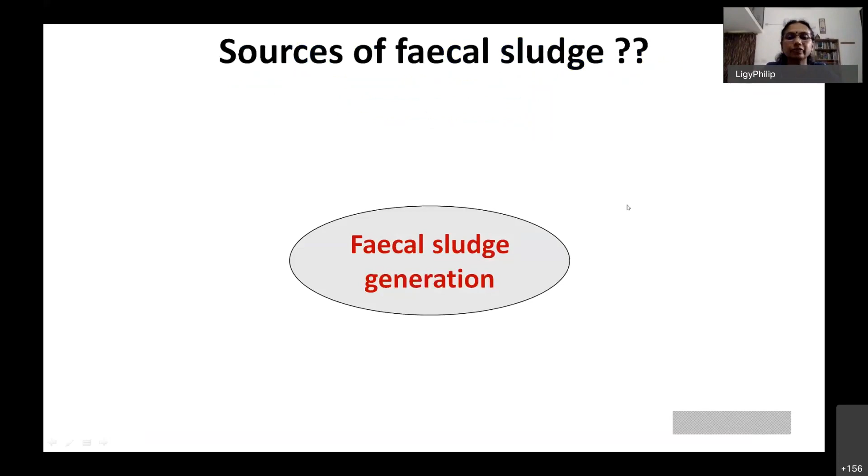The sources of fecal sludge we have seen earlier, I'm just bringing it again. From septic tank, pit latrines, portable toilets, aqua privy, holding tanks, pump chambers, dry toilets, and unsewered public ablution blocks - everywhere the fecal sludge generation is there.

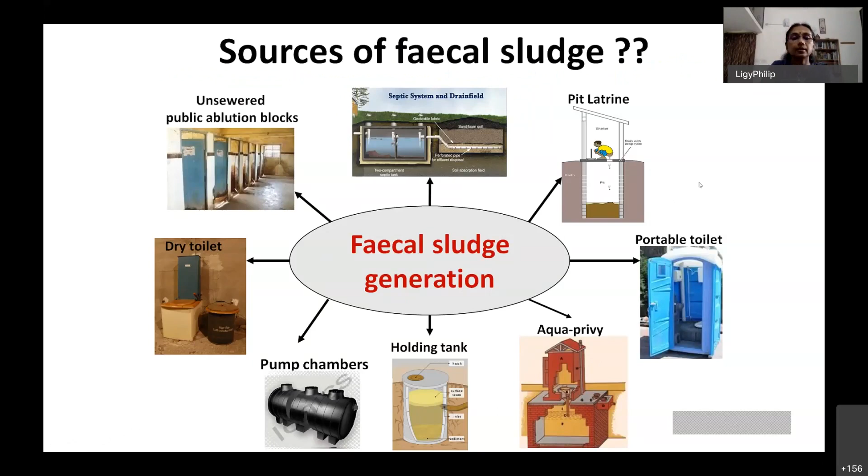If you see the septic tank in India, many places this is the condition of the septic tank - overflowing and all. And if you see a properly designed septic tank, it is something like this, with minimum 2 chambers. In the first chamber, all the solids accumulate, and it comes to the second chamber. Whatever water comes out of the septic tank is not completely treated - around 50% BOD or COD will be left over, along with lots of pathogens. So we have to have a proper drainage field.

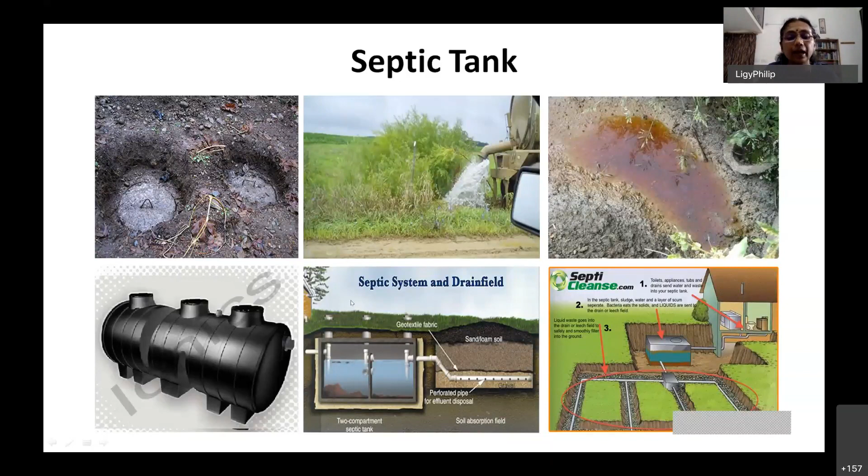But in many places this is not being practiced - we just put it into a leach pit, and if the groundwater table is high, everything is getting into the groundwater. The sludge, with respect to time, will be accumulating and occupying a significant volume of the tank. Then the tank starts overflowing, so we have to empty the septic tank - that is septage - and we have to manage this properly.

So septage management in India - total sanitation coverage is, as I told you, and these are the conditions. Many places you can see that the emptying tankers go and empty, put it in some place where people are not watching, and everything is getting contaminated. Poor maintenance and disposal practices and lack of knowledge on proper technology - all these things are existing.

Why is septage dangerous to the environment? Mostly let out untreated, causing aesthetic issues, contamination of water bodies, greenhouse gas emission because it has a lot of undigested organic matter. Then lots of pathogens and other emerging contaminants are present, creating health issues. Untreated septage is, in many places, disposed into agricultural land as a nutrient, but this can cause problems because it has a lot of pathogens - whoever is working in the agriculture field can contract diseases.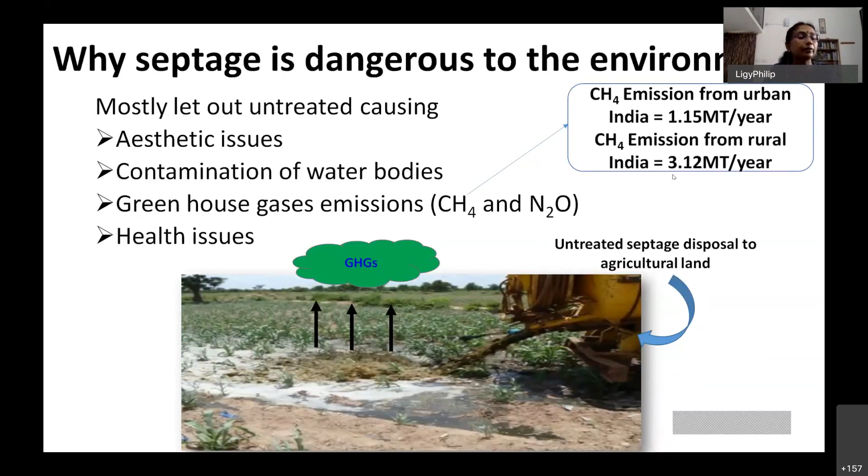Greenhouse gas emission from urban India is around 1.15 metric tons per year. Rural India is around 3.12 metric tons per year from septage alone.

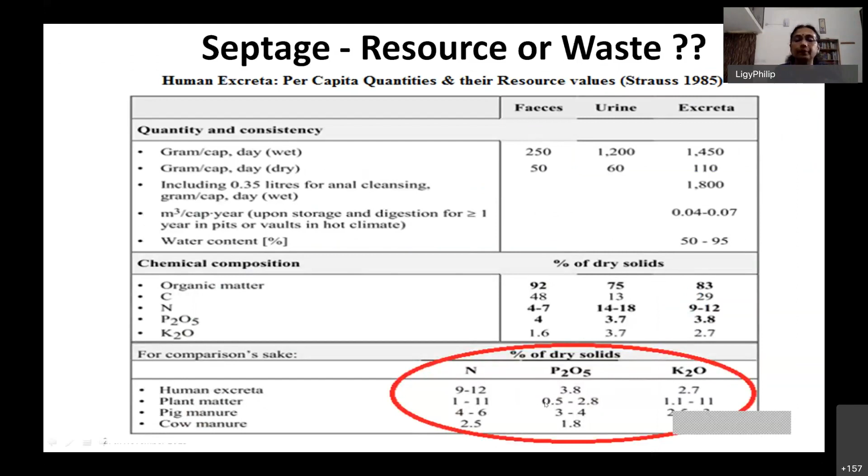When we talk about septage, is it a resource or a waste? This is very important. You can see that human excreta has a large quantity of nitrogen, phosphorus, potassium, etc. So instead of considering it as waste, if we can process it properly, it will be a very good manure. That's what we were looking into.

We have done a lot of work - I'll go quickly. When we wanted to do the work, we were looking into the septage quality or characteristics for India, and we could not find a single document on that. So what we have done is collected some 200 plus samples from Chennai city to get an idea about the characteristics of the septage. Without knowing the characteristics, we will not be able to design the treatment system.

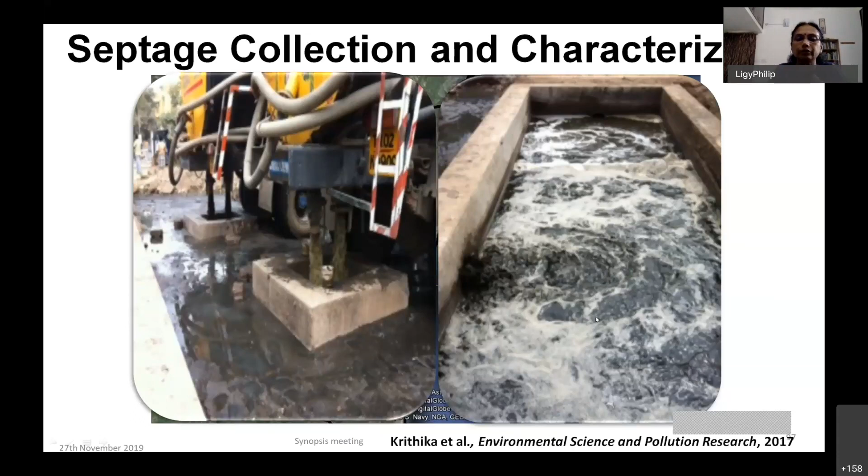These are the locations where we collected the septage samples, and we collected in 2 seasons to see how the seasonal variation is happening. In Chennai city, there are provisions in existing STPs where the septage or tank emptying tankers can come and deposit the septage in the treatment plant. So we approached the tanker lorry operators and collected samples from them, gave a questionnaire and carried out interviews about where they are collecting and all the things. So we got all that information - this is the characteristics.

Volatile solids can be as high as 14,400 in some places, but the minimum is 307. That means it is a dilute wastewater. So there is significant variation in the quality of septage - volatile solids, BOD, COD - significant variation among the septage samples. So we have to have a treatment system which is able to take care of this variation in the characteristics.

Only very little, 2% or less than 2% solids are there, so we have to have a dewatering system. How can we do the dewatering? We have tried coagulation, flocculation - it is very costly. Then we looked into sand filters, then reed beds. Sand filters also get clogged fast, so reed beds seemed to be very good.

So we allow the septage to pass through the reed bed, collect the filtrate, and the solid from the top you take out. This is the septage solid, and this water needs treatment because it has very high COD. In rural areas we can use constructed wetland or similar systems for treatment. In urban areas, if you have an existing STP, this can be put to the existing STP for treatment.

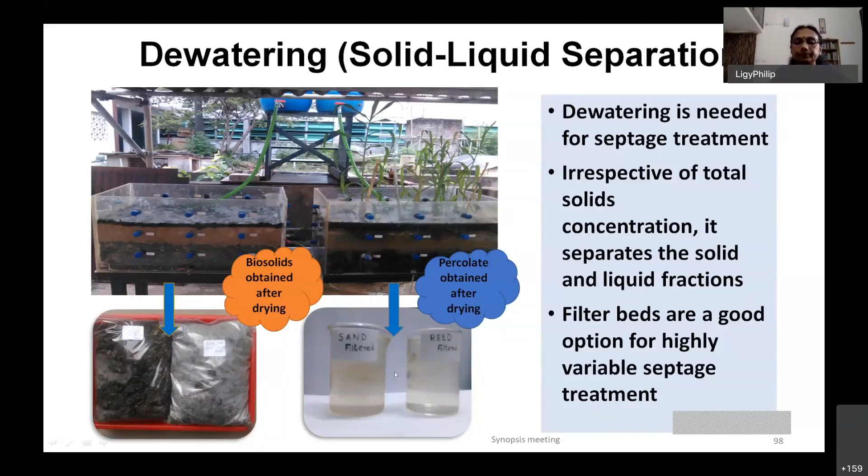The septage is a very sticky material, so we have to have suitable feedstock. We collected locally available materials and did extensive screening and characterization. We looked into various things for selection of suitable feedstock, including the water holding capacity.

The most important thing is that septage will have a lot of pathogens present in the system, so we have to get stabilized compost. The temperature of the composting system should be above 50 or 55 degrees centigrade for a prolonged period of time, otherwise your pathogen destruction will not happen. So you have to identify the feedstock composition so that you get this high temperature - you have to conduct a self-heating test and identify the optimum mix.

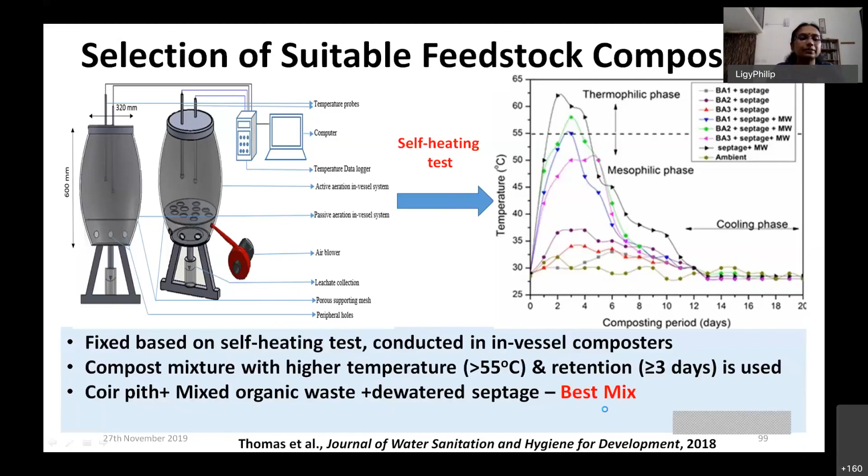We found that a mixture of coir pith, mixed organic waste, dewatered septage is the best mix, and we were getting above 55 degrees centigrade for more than 3 days, which is a requirement for obtaining good compost. We did a lot of work to arrive at this. Then we looked into compost dynamics - how the temperature varies, how the loss of organic matter happens - to optimize the conditions.

Different international agencies specify ammoniacal nitrogen should be less than 700 as per HKORC, and another standard is 75 to 500. In our case, it was always within the permissible limit. C/N ratio should be less than 25 - we were getting 10 to 17.

pH value should be between 5.5 to 8.5, and that's what we were getting. For seed germination, which tests the toxicity of the compost - if you put the seed in a control condition versus the extract from the compost, germination should be greater than 80 to 90%. In our case, we were always getting more than 100% compared to control, meaning the compost has many nutrients which improve seed germination.

Total NPK should be greater than 4%, and we were getting that. What I am trying to say is, we see septage as a major problem, but if you process it properly, it meets all the requirements for a very good quality fertilizer. So it can be used as a fertilizer.

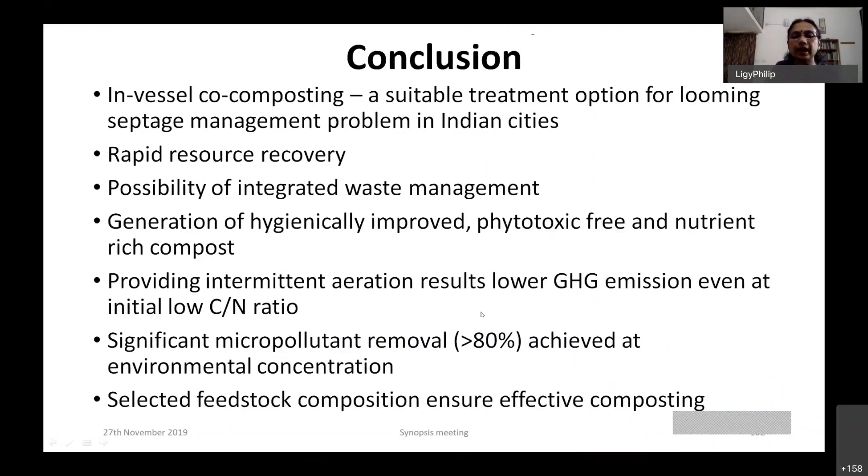So this is the conclusion - these are all lab scale studies, and we have a lot of publications on this. So by doing all those things, are we going to help rural India? We thought that whatever we have done in the lab, something has to be taken to the field also, so that rural India gets benefited.

So we have done something for sustainable waste management and resource recovery for a clean and healthy village. The benefit is improved cleanliness and hygiene on a sustainable basis. Definitely it will improve health, and income through resource recovery from solid waste and wastewater. It will protect water sources from contamination and increase water availability, since we are recycling water and protecting the sources. So both benefits will be achieved.

For solid waste management, initially we took only a small part of the panchayat, around 250 households, and segregated waste into 3 categories: organic, inorganic, and sanitary waste, because most households use diapers, sanitary pads and similar items. If you mix these with others, the quality gets affected. So we used a three-bin system.

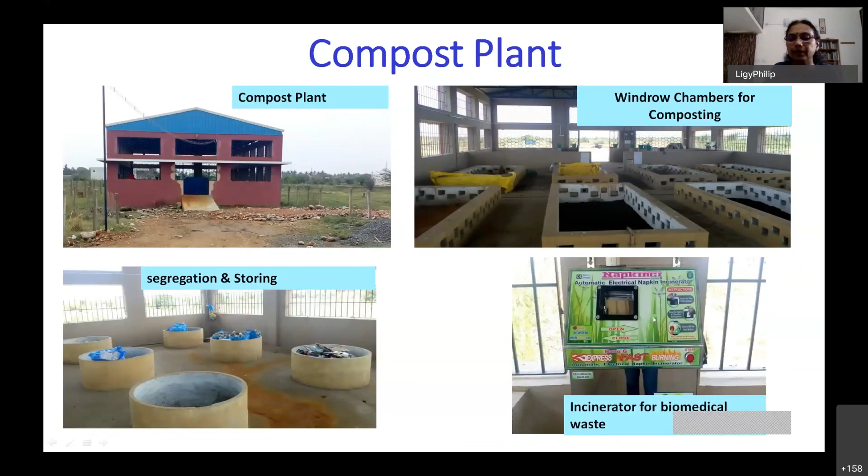This is our compost yard. This is the segregated inorganic waste, which we divide into about 18 different categories. We have also provided an incinerator to manage sanitary waste, meaning diapers, sanitary pads and similar items.

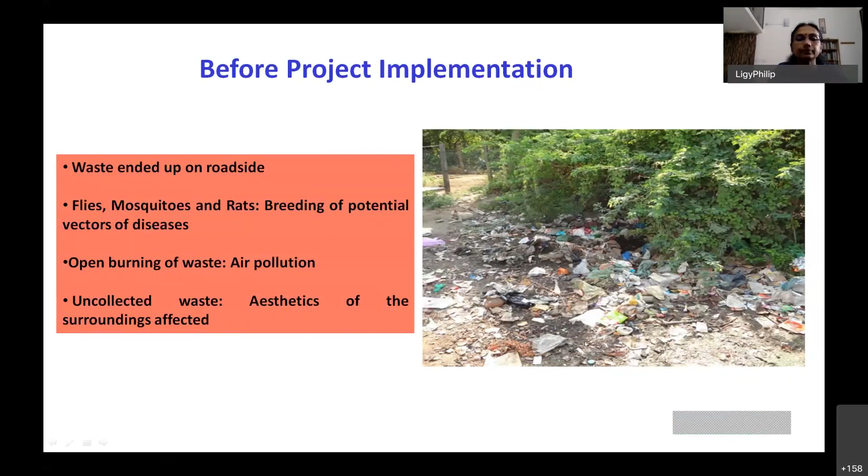This is the door-to-door collection by our workers. This is after project implementation. Before we started, we talked to government officials and villagers, and conducted a massive cleaning of the area. Then we started the waste collection.

We started this project 3 years back, and even now we are continuing it. At any time we go, this is the condition of the village — not a single piece of waste can be seen anywhere.

This is organic waste turned into compost. They are making the compost, and we are getting very good quality compost while assuring the quality. We monitor it at IIT Madras, and they sell the compost.

For a 1 kg packet we get 20-25 rupees, sold in the market by the workers. In bulk we get 10 or 15 rupees per kg of compost. So that is the composting process, and many people are doing it.

So what extra have we done? How are we going to manage wastewater? In that panchayat, they didn't have any stormwater drain or sewer, so we conducted a complete topographical survey and identified all the lanes, houses, and other features.

Then we provided a stormwater drain, an open drain, so that whatever rainwater comes gets collected. They had a water body, which we cleaned, and made sure all the rainwater flows to it without obstruction, so the water collected in the water body was increasing.

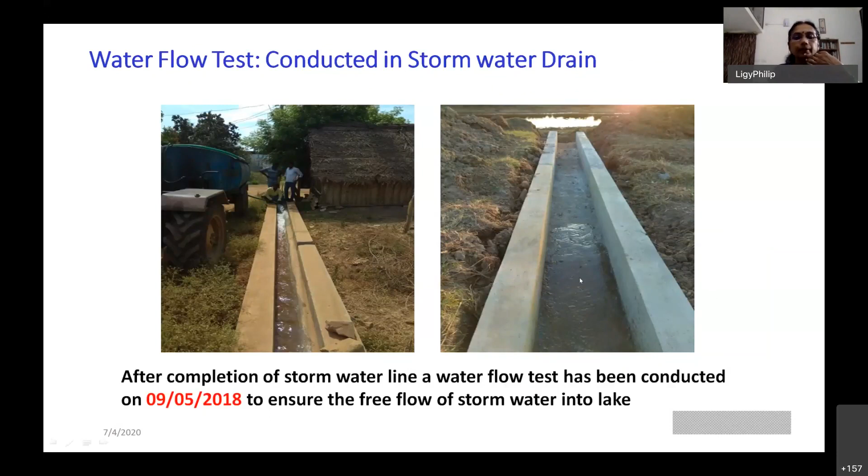Then, in the drainage system, we provided another pipeline — you can see this PVC pipeline with chambers in between. This PVC pipeline collects all the grey water and septic tank effluent from each household, because otherwise this water was coming out and pooling on the roadsides, becoming a breeding ground for mosquitoes.

We thought that providing a full sewer system was very difficult, and all the houses already had septic tanks. So we didn't disturb the existing septic tanks. Instead, we asked residents to connect the pipelines from their bathroom, kitchen, and septic tank outlet to this new pipeline.

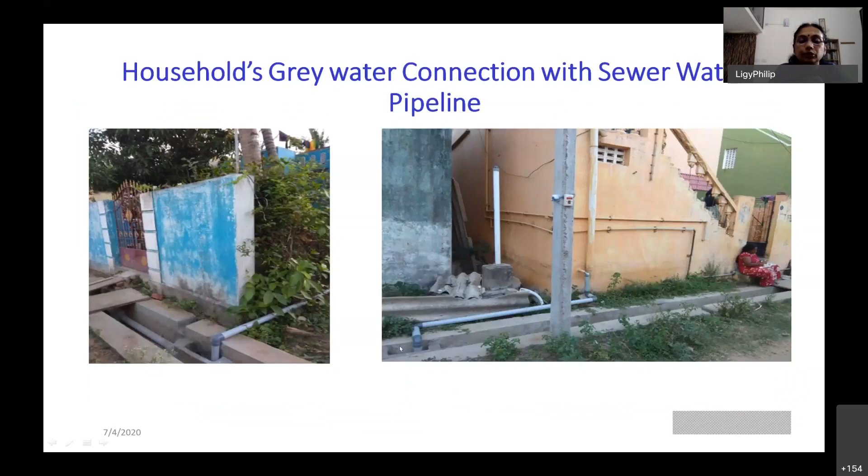I'll show you — this is what they have done: septic tank outlet and bathroom connections come into these chambers, and through the chamber it flows into the pipeline and onward. You can see this has been done in all the houses.

Okay, so what we are doing is the stormwater is going to the lake, a small lake they have. The grey water or wastewater we collect and bring to another location very near our compost plant, where we have put our constructed wetland.

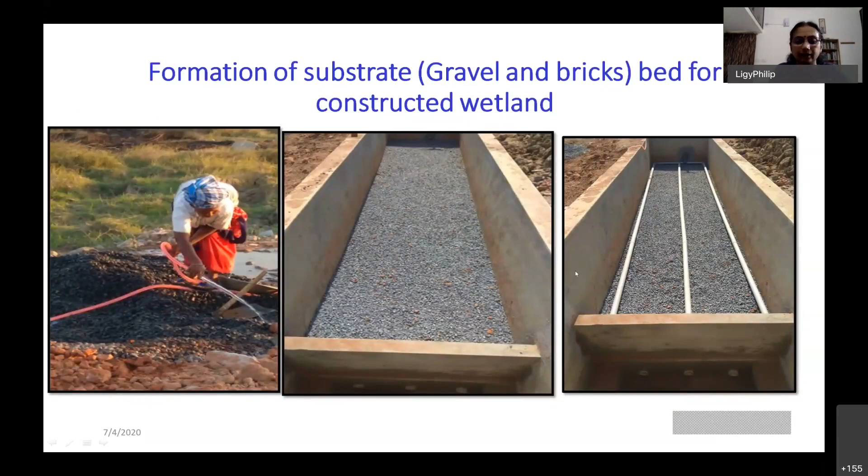The design, everything, is done based on the research we carried out in IIT Madras. Okay, so this is the constructed wetland you can see, a very good constructed wetland. And this is the collection tank, and this is the outlet water, inlet water and outlet water.

You can see that the quality of the treated water is very good, and this water is being used there, because the compost plant is situated in the agriculture field. So whatever water comes out of this, we are pumping it and using it for agricultural purposes.

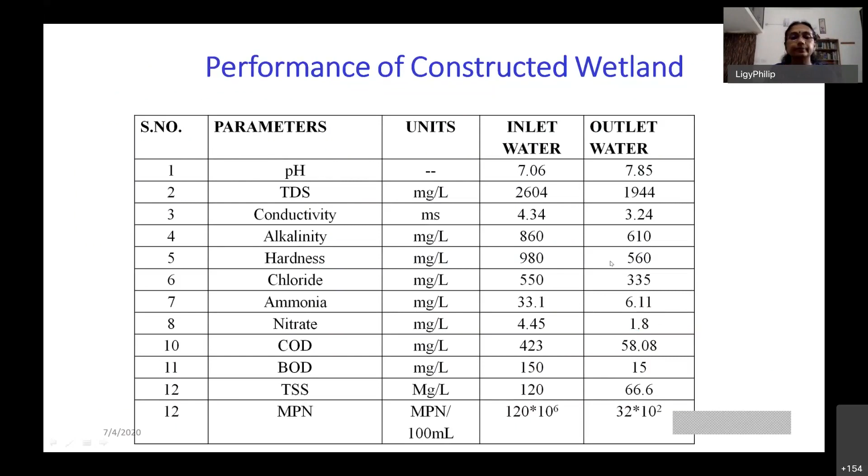By seeing this, many other villages and government agencies have come. So we are now working in other villages, Singaperumal Koil in Kanchipuram, and in Nagapattinam. It is funded by CPCL, Panangudi, Rajapuram, and Vellapakam. Because of this project, CPCL got the Best Industry CSR Activity Award last year. Thank you very much.